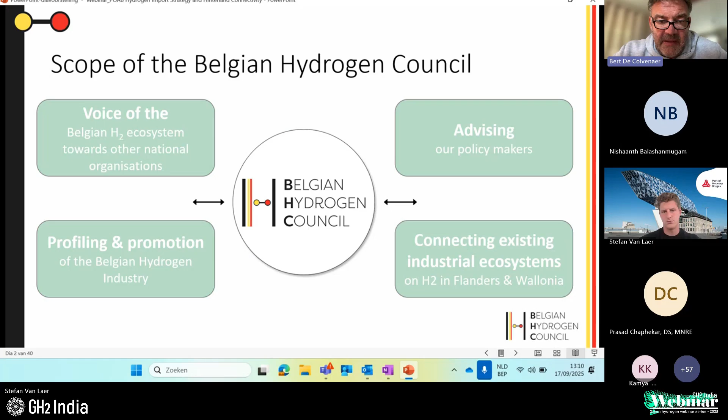Next slide, Stefan, thank you for sharing. As part of the different discussions next to the MOU we have signed in India during the missions, we have signed with Oman, we have signed with our neighboring countries, Germany, Netherlands, and France, because we believe that it's important to gather the Belgium industry and have a common voice, a one voice approach towards all of these partners, these different countries.

Next slide. The ambition of Belgium in the wider context is because of our geographical location in the center of Europe, if we may say, and also because we are right in the middle of the sweet spot of hydrogen in the Benelux, Germany, and France, where we have not enough green energy, so we need to import. We believe that with our capacity, with all the different harbors, we could feature as the import hub of green energy / hydrogen in these regions.

We have the port of Antwerp-Bruges, we have the North Sea ports with Ghent and Vlissingen, we have closely linked to the port of Dunkirk and Ostend. A lot of capacity to bring in hydrogen in its different ways and forms from across the world into this region, together with the currently being built pipeline network. You can see on this slide the different green lines for internal distribution in Belgium, but also to our neighboring countries, the Netherlands, primarily Germany, also Luxembourg and France.

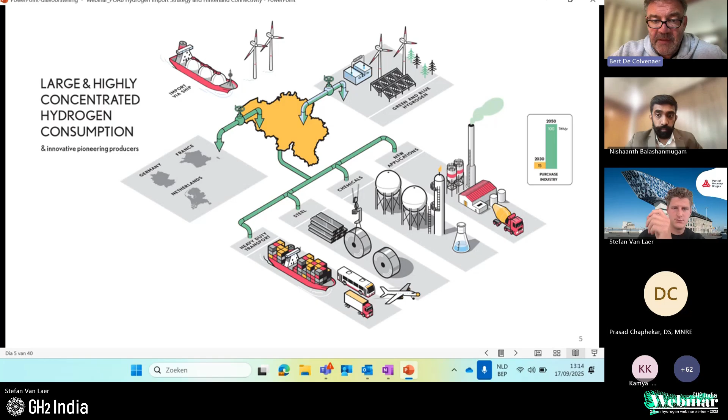The second point of the strategy is the internal consumption, which I illustrate on this slide. And the third one, on the next slide, is the capacity we have as technology providers.

At the moment, we have two important electrolyzer manufacturers with Cummins and John Cockerill. And we have different component suppliers like Agfa with the membranes, Bekaert with the diffusion layers, Borit with the bipolar plates. So all important components necessary for hydrogen production.

And I'm sure in India you have heard of all these. With all these components and many more, I will limit the discussion; more information you can find on our website. We are able to produce the applications ourselves, which you see on the bottom part: mobile applications, stationary applications, production applications, pipelining. So we have a lot of possible applications.

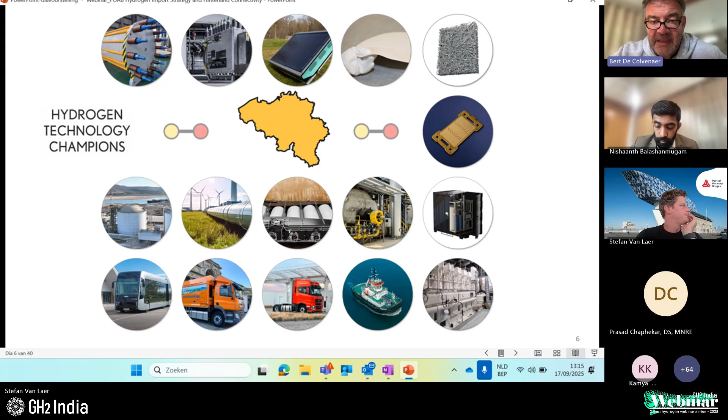So I think there are many reasons why we want to talk to the hydrogen production side. And for that, on the next slide, we have recently signed the MOU between our both countries.

As explained, the drivers for the MOU are, first of all, your abundant renewable energy sources in India, which could be used for making hydrogen. And our ambition, of course, for internal consumption, but also to be the gateway or import hub for hydrogen in Europe. Now, what is written in that MOU, simply said, these are hooks we can hang any further ambition or collaboration on.

So it's about technology collaboration, exchanging some knowledge and best practice, part of what we are doing today. The trade facilitation to make sure we develop new supply chains for the production, the transport, and the import, what we do here.

Stakeholder engagement, we have to make sure that all our industries and governments understand each other. Financing, some joint forums and collaborations to motivate, stimulate policy discussions, and showcase what we are actually doing, and making sure we understand each other's ecosystem. In both regions, we know what we do from each other, so we can rely on each other's capacity.

That's what's been signed in the MOU. And part of the implementation of that MOU is today's discussion, as you can see on the next slide. We have elaborated a couple of activities which are going to happen in the near future. During the EU Hydrogen Week, there is a delegation coming over and visiting Antwerp.

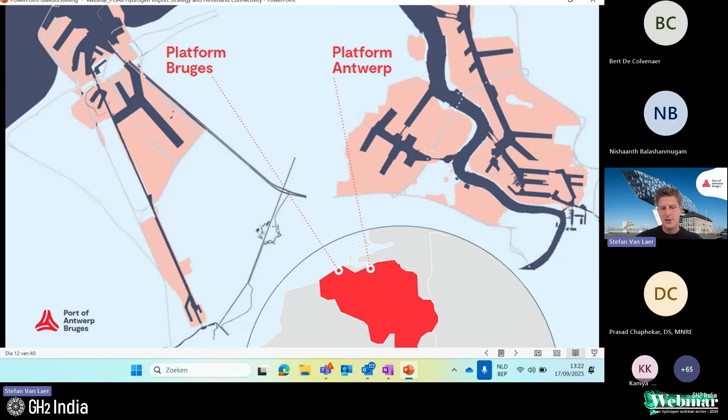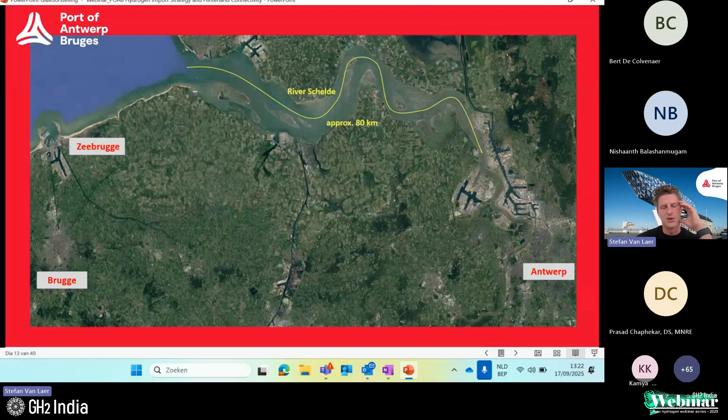Maybe the next slide is even better, you see it here geographically. There is actually about 100 kilometers, or 80 kilometers, of the River Scheldt between the two platforms, where Zeebrugge is really a deep sea port located at the seaside. Antwerp is more of a fluvial port, but due to dredging and years of experience, we are welcoming the largest seagoing vessels also in Antwerp. So in terms of draft and welcoming these large ships, this is not a problem at all.

What happened actually after merging the two ports, the two platforms, is that we have become the second largest port in terms of container capacity in Europe, after the port of Rotterdam.

And in the first quarter of this year, we also briefly surpassed Rotterdam in terms of container traffic. Also, one of the important aspects of our port, already indicated by Bert in the introduction, is that we host the second largest petrochemical cluster worldwide in our port in Antwerp.

So we have a lot of containers coming in. We have a lot of customers actually in the port itself, in the chemical cluster, which also leads to the logical consequence that there is a huge amount of logistical traffic going on in our port.

And if you take the broader picture, not only our port, but the Port of Rotterdam and Port of Duisburg, which is called the ARA region - Antwerp, Rotterdam, Amsterdam, Rhine-Ruhr region - we have 40% of European industry located in this triangle, and basically the bulk of the heavy-duty logistics is also going on in this triangle.

So, long story short, huge energy demands, huge demand for hydrogen to decarbonize our chemical industry, to decarbonize the logistics going in between, and to decarbonize our economy as a whole.

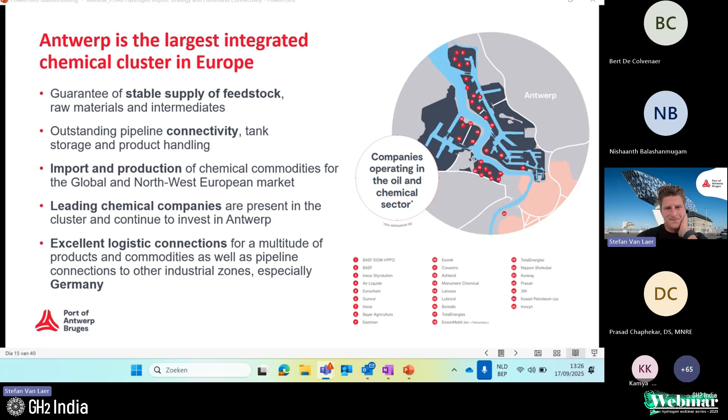So a large petrochemical cluster in Antwerp, making us already an energy port today. We have 20 million tons of chemicals output every year. We are a large LNG import hub, which I will come to in a minute. We have 2 refineries in our port with ExxonMobil and Total Energies, with 40 million tons of oil refinery capacity. Already today, there are 1,000 kilometers of pipelines running through our port, which transport over 60 products.

So it goes from all types of chemicals you could imagine. And there's already quite some tank storage capacity today - the storage of ammonia, the storage of methanol already being done today, it's nothing new to us. So also in terms of safety, in terms of permitting, we know how to do it. The only thing that might change with the energy transition is, of course, the size and scale of things, which probably will increase.

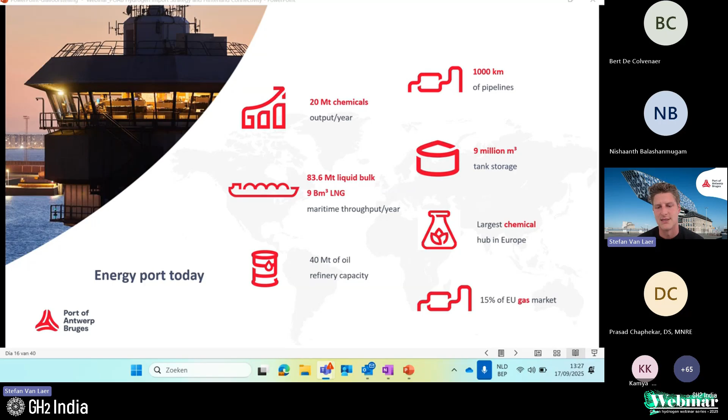So that's fossil, of course - today, a service that we deliver to Germany. But in the future, we would love to do the same for low carbon molecules - ammonia, hydrogen, LOHCs, whatever carrier you can imagine. And this might be an ideal location in the future to build such an ammonia terminal, for example.

So that was the introductory part. Let me change... Okay, maybe one thing I haven't mentioned yet - it was a bit of a good news show up until now. So, the second largest port, a large logistical hub, the second largest petrochemical hub.

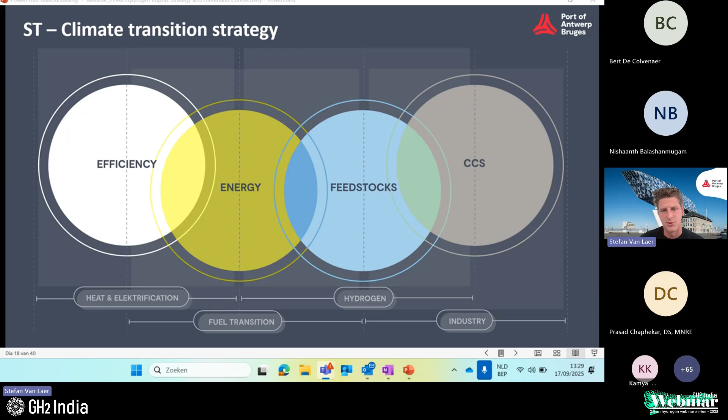The supply, where will we get the molecules? Will we produce them ourselves? Will we import them? Will it be blue? Will it be green? What type of molecule will it be? That's in the supply part.

And infrastructure, extremely important, of course, is divided into two pieces. One is the pipelines, and the other one is the import terminals and cracking facilities.

And then towards the end, of course, somebody has to consume the hydrogen once imported. So we work also very much on the offtake, which might be the most difficult piece of the puzzle today. But we're working very much with the companies to make this reality.

General remark: we are color agnostic, meaning that we will accommodate any type of molecule that will help us reach the climate goals, except for gray, of course, although the legislative framework in Europe is of course pushing very much towards RFNBO or green hydrogen.

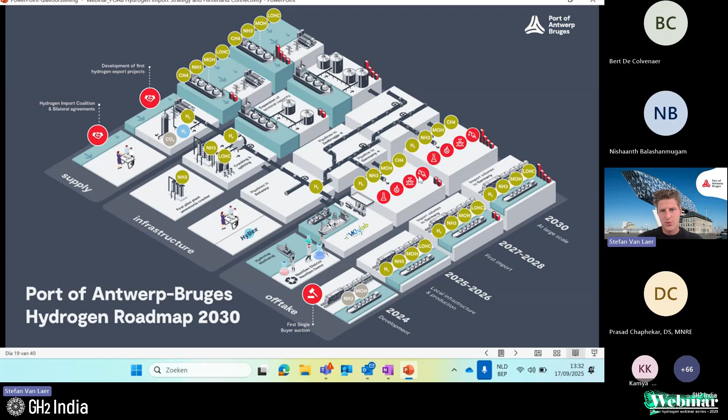Then we start with the first part, which is supply. I think Bert already indicated briefly in the beginning that Belgium, and actually the region around us, is defined by the fact that our energy consumption, or the need for energy, is far larger than our own potential to produce renewable energy. And for Belgium, it's even more the case than, for example, for the Netherlands and Germany.

If you would have a look at the Belgium geography, if you would open your Google Maps for a moment, you see that we have a coastline, but it's quite short, it's 70 kilometers, more or less. So we're working very much on offshore wind, we're working on wind parks in that region. But basically, the electrons coming from those wind parks will have to be used for direct electrification of our transport, of our chemical cluster, of our industry. So basically, we don't have a surplus of electrons in Belgium available for large-scale hydrogen production.

That doesn't mean that we don't do anything. We have a 25 megawatt project in Zeebrugge already being built today. It's small, but it's one of the pioneers, so it's being built, which we are proud of. But of course, when we talk about the large quantities, they won't come from this project alone. We're working also on a blue hydrogen project that is bigger in size, local production, but that's more or less about it.

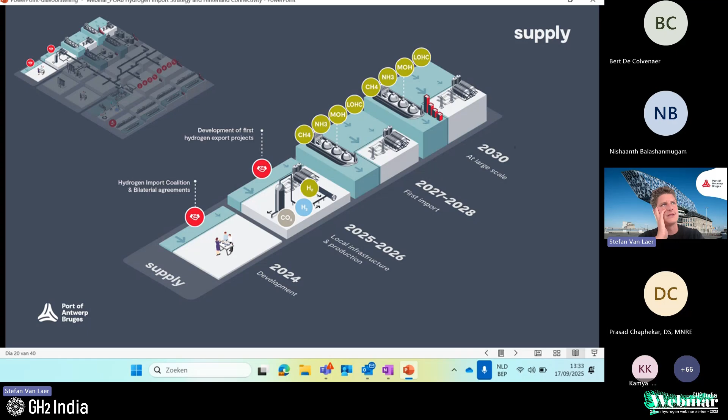So long story short, we're looking very much at importing hydrogen, which Bert already indicated. And together with a couple of Belgian players like DEME, who's a project developer, like Exmar, who's a shipping company, ourselves, and Fluxys, who is an infrastructure company building pipelines, we have developed the Hydrogen Import Coalition.

If you would Google the report Hydrogen Import Coalition, you would find a detailed report that calculates back from European targets towards the Belgian context. So what do we need? What are the volumes we are expecting? What are the terminals we would need? What are the quays we need? What types of ships would we need to actually make these European ambitions reality in Belgium?

This was already indicated by Bert. This more or less leads up to numbers of importing one-third for local consumption in Belgium and two-thirds for the rest of Europe, mainly Germany. This is not an invention of ourselves. We have compared this also to the German hydrogen strategy, and the numbers align quite well. It's what we do also today for natural gas. We import one-third for our own consumption and two-thirds go to the rest of Europe, mainly Germany.

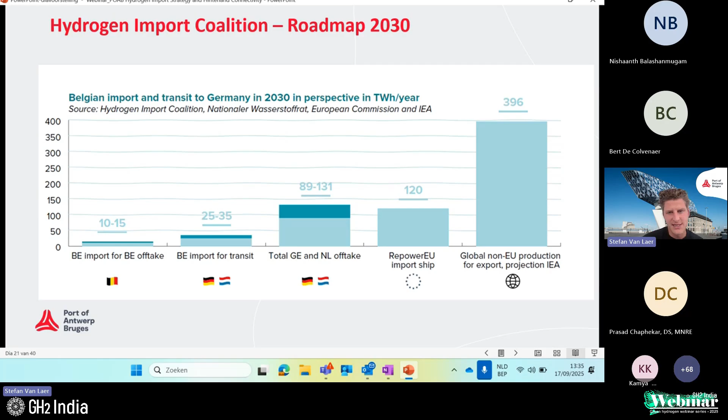Now, this was developed in 2021, if I'm not mistaken, maybe 2020 even. So things have changed, of course, with the Russia-Ukraine war, a new geopolitical context, a new economic context in Europe. So we have done the same exercise more or less again last year, together with the terminals who are developing projects here in Antwerp, and we have tried to come up with maybe a more realistic or adjusted number. But still today you see that we could import by 2030 between 1 and 2 million tons of hydrogen equivalents.

One-third for Belgian demand, two-thirds for throughput towards Germany. So even though the storyline you hear in the press is a bit less enthusiastic or hyped as a few years ago, we still see realistically quite some demand developing here in Belgium, in the region, maybe a bit slower than initially thought, but the demand is still there, slowly but steadily. In a potential future workshop, we can definitely go into it in more detail - where is this demand, how is it based on policy, what type of policy. I think that might be interesting for one of the following activities in this MOU.

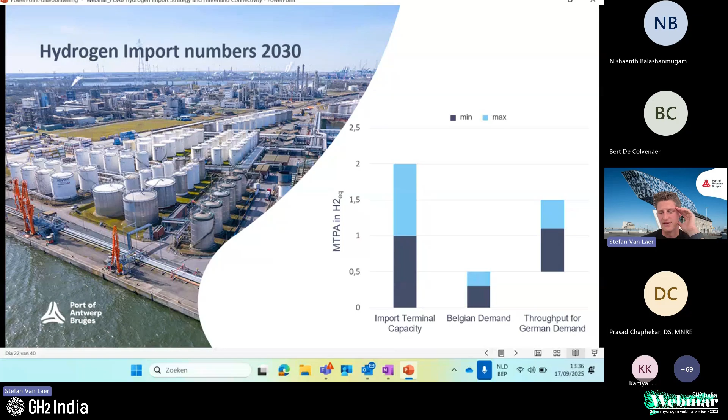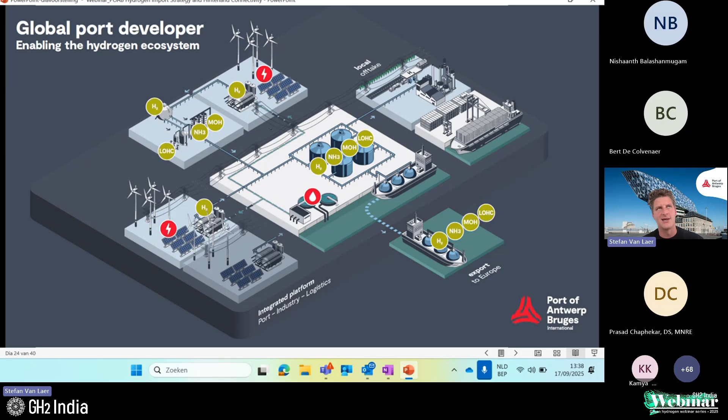But now with the energy transition, they're also looking more and more into hydrogen projects. In that regard, we are also, through this vehicle, investing worldwide in other ports with the aim of exporting ammonia and hydrogen towards our ports or across the globe. For example, we have bought a stake in Porto do Açu in Brazil. We have a stake in Port of Duqm in Oman. And the latest news was also that we will invest together with Namport in Namibia, in Walvis Bay, to build out a complete new port there with the aim of exporting molecules across the globe.

So when I showed you in the beginning the team of Port of Antwerp-Bruges that is working on this MOU together with GH2, Achille was on that slide, and Achille is working at Port of Antwerp-Bruges International. So I call him a colleague - he is a colleague, but just so you have that slight nuance with you.

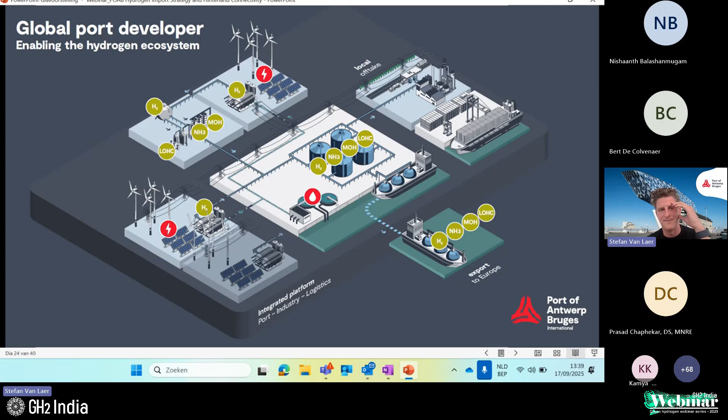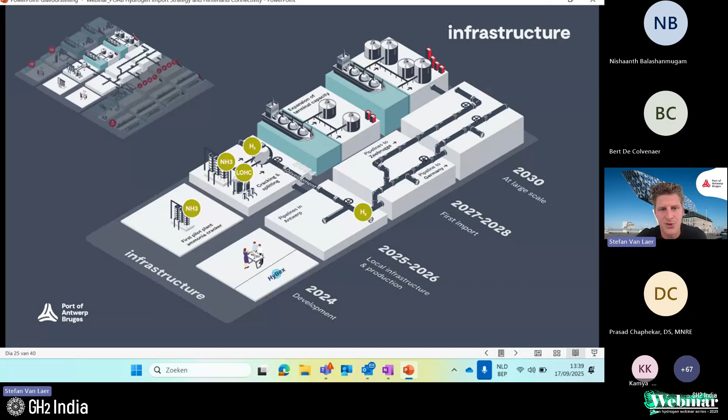Coming to the infrastructure part of our import strategy, I mentioned before it's two parts: one is the pipelines, and the other one is building import terminals and cracking facilities for ammonia or LOHCs. In this slide, you will see the publicly known projects that are being developed for now.

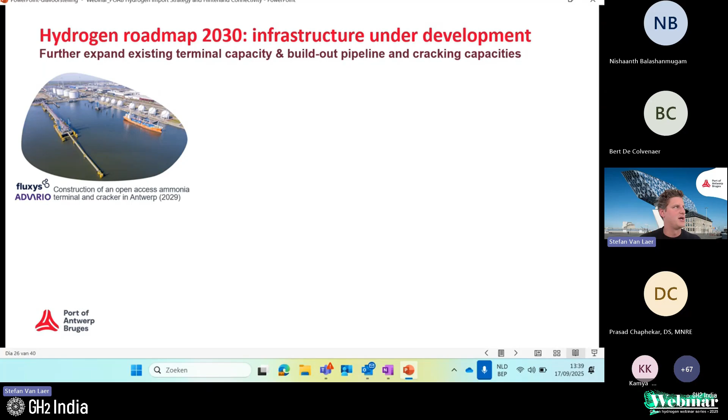So first one is Fluxys and Advario collaboration. Fluxys is a name you will hear more of further down. It's actually our national gas grid operator historically, but also since about a year and a half has been designated by Belgian law as hydrogen network operator. They're also developing an import terminal for ammonia and a cracking facility in our port together with Advario, with the aim of becoming operational by the end of 2029, 2030. Of course, timelines are always difficult.

A second project, an interesting one, is Vopak. What they have done is acquire a plot of land in our port which was actually a refinery - a Gunvor refinery that had to close during the COVID crisis and never opened again. So we got the concession back as a port, put it into the market for clean energy developments, and Vopak won it. It was quite impressive to see that during the past year and a half they cleared out the entire plot - the refinery is gone.

All the old terminals, storage tanks for diesel and crude oil, have been torn down. What they are doing now is a complete soil remediation, which should be done by the end of the year, maybe a bit further into the new year. Then they will have a 90-acre plot, if I'm not mistaken, completely available for new energies - CO2 storage, ammonia cracking, methanol storage. A very interesting case. They recently announced they have finished pre-FEED and entered into a FEED study for this project.

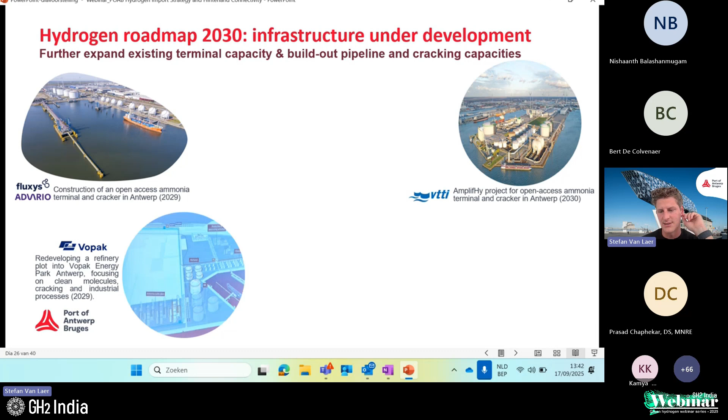Then VTTI, a similar project - open access ammonia terminal and cracker, also here in Antwerp, with a timeline of 2030. They have also announced recently that they have filed for their environmental permits. So just to show you these projects aren't just PowerPoint presentations, they're really taking steps. We hope to see one of these projects taking FID in, let's say, beginning 2026. We hope that will be a milestone.

Then last but not least, we hear a lot about ammonia cracking worldwide, but it's mostly hopes and dreams and plans most of the time. We actually have, with Air Liquide, a first industrial scale pilot operational as we speak today in Antwerp. It's located at the BASF site. Air Liquide has revamped part of an SMR into an ammonia cracker. It's operational today - they're testing the technology with this, and they have also received European funding to build a fully large-scale industrial cracker in our area by 2028.

So these are the four, let's say, publicly known projects. There are projects apart from that being developed by C-Tank, by LBC. They prefer not to be on a slide, so we respect that, of course, but just know that if you want to contact all the terminals, there's more than these four alone.

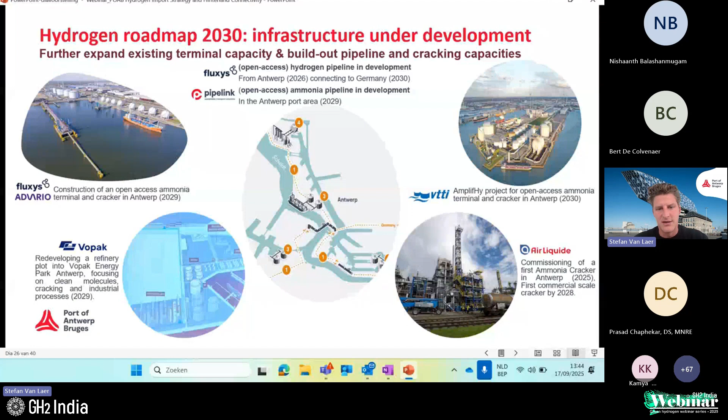Then maybe an interesting second daughter company we have at Port of Antwerp-Bruges is Pipelink. It's an infrastructure company, and as the name indicates, specialized in point-to-point pipes. These 1,000 kilometers of pipes that I mentioned in the beginning are operated by Pipelink. They're also developing an ammonia backbone locally in our port, because ammonia is being produced, imported, and used in our port. So it makes sense to have an ammonia backbone as well.

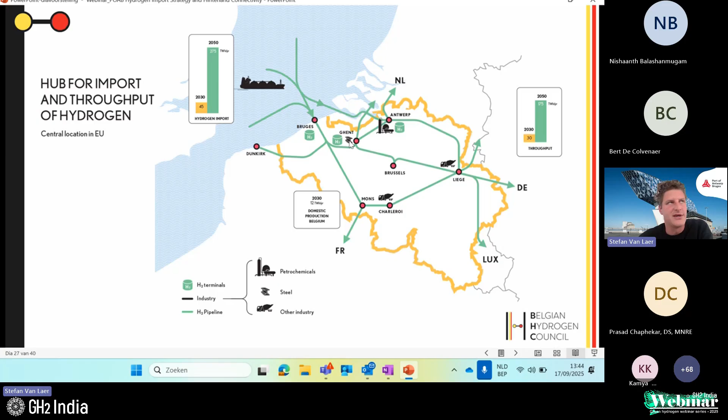And then the second part is, of course, the infrastructure. Bert already showed this and said most of it. We're building out a newly built hydrogen backbone in Antwerp, in Belgium. The first phase is already being built as we speak, connecting all the industrial off-takers in our port in Antwerp and connecting our port to the port in Ghent, where you have ArcelorMittal, which could potentially also be a large off-taker in the future. That's phase one. Phase two is building out the rest of the network, with the connection towards Germany being a very high priority for us.

And Fluxys is aiming to make that connection by the end of this decade, to then connect to OGE, which is the operator from the German side. And it's interesting to know that Fluxys has a 25% stake in OGE, which of course makes all discussions on the what, the how, and the where we will make this connection a bit easier.

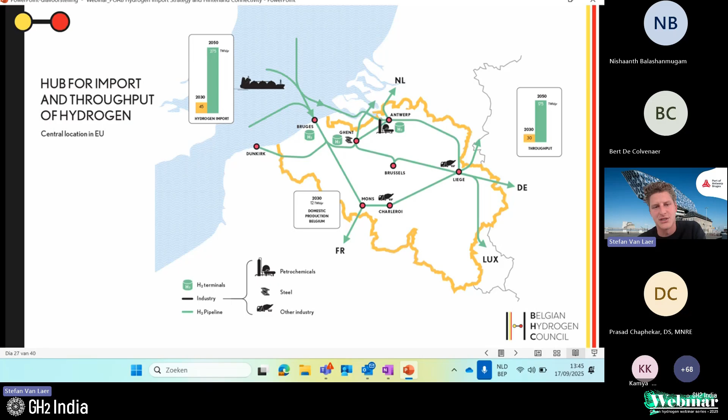This is the current use. There might be some new uses popping up in the future, like for example, Ineos is building its Project One, which is a large ethane cracker that will be fed with shale gas from the USA in the first instance, but eventually we'll also have to switch towards more sustainable fuels, and they are looking at hydrogen as well, so might be a future user. ArcelorMittal in Ghent, as I mentioned, might be a future user.

So I think in the future we can dive into these two sectors in Belgium and maybe in the neighboring countries in a future webinar, to spell out in more detail where this offtake is coming from and how much it will actually be. So this is Belgium offtake.

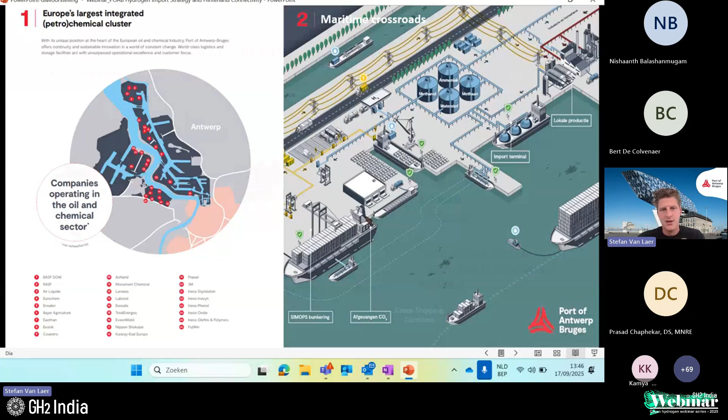The name of the webinar was Port of Antwerp-Bruges Hydrogen Import Strategy and Hinterland Connectivity. So we're coming to the Hinterland connectivity part now, in the second part of this webinar.

I don't think I tell you anything new if I tell you that there is a huge consumption potential in Germany. So we have done a study together with Fraunhofer to map where this potential consumption in the future is actually located. Also there is no rocket science involved - it's North Rhine-Westphalia, of course, who is one of the target regions, heavily industrialized but landlocked, so they don't have their own port that can supply them. So they're looking very much at Port of Antwerp-Bruges, Port of Rotterdam as supply routes for their sustainable molecules.

Yeah, this is just an overview. We are targeting all these companies in all these regions in Germany to have a bit of an overview of what is actually the amount they intend to consume, what is their timeline, what are the barriers they still experience, how can we help them. Some exercise that is ongoing this year from Port of Antwerp-Bruges side.

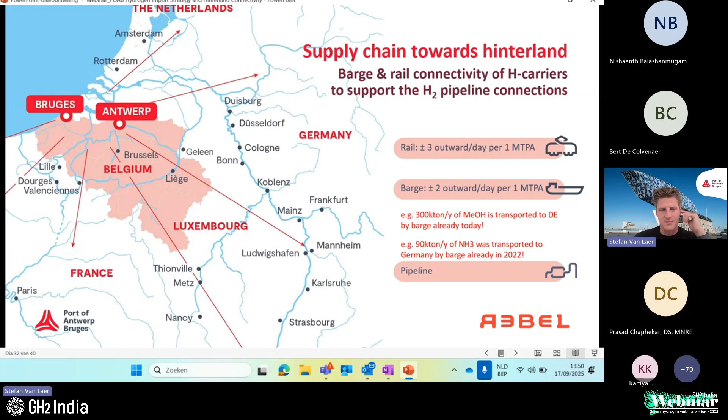And in the next couple of slides, I will present you the main conclusions from this study. So you see here in one slide or one overview what the study has done. Basically it has benchmarked four import locations, import hubs in Antwerp, Rotterdam, Wilhelmshaven and Brunsbüttel for the import of ammonia and methanol, but let's take ammonia as an example in this case, to four destinations in Germany: Duisburg, Leverkusen, Ludwigshafen. Geleen is not Germany, but the Netherlands.

In terms of 3 transport modes—barges, rails, and truck, also via roads—you see that explained here on the slide. It's benchmarking ammonia and methanol supply from 4 import hubs towards industrial destinations in terms of connectivity: rail, barge, truck. What are the parameters investigated in this study?

It's the cost, of course. What is the cost of taking the quantity of ammonia from Antwerp to destination X? Let's also take Duisburg as an example, as the main location maybe. This is influenced by the distance, how far you have to travel, but also, for example, the waiting times at locks, etc. So that is one parameter.

The second one is capacity. How many wagons do we need? How many vessels do we need? Is there congestion on the railroads? Is there congestion at the locks? That's also investigated. Are there any barriers there?

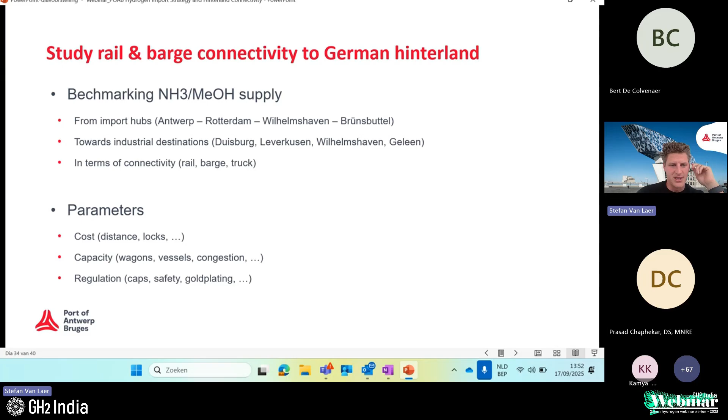What you see here is the cost comparison between the 3 transport modes. Let's start with truck to already leave it out. You see, because it's smaller scale, it's far more expensive transporting ammonia through trucks. So for the rest of the slides and the study or comparison, we will leave out trucks. Also maybe from a safety aspect, I wouldn't recommend transporting ammonia through truck via busy roads in Antwerp and beyond. So it doesn't seem like a good idea.

But if we compare barge versus rail, you see that more or less, to a large extent, the two are competitive with each other. The types of barges you see go basically from smaller to bigger ones. The mostly used type is the middle one today, but there is still potential in the market to shift to the larger, third one.

Which will be done probably in the future, making barge a bit cheaper in the future. And then for the trains, it depends on the size of the trains or the wagons, how many tons you can carry, and also whether you find a return cargo—you bring ammonia from Antwerp to Duisburg, but can you bring something useful back from Duisburg to Antwerp? This would also influence the cost of your transport. But main conclusion here: truck not competitive, and barge and rail more or less at par with each other.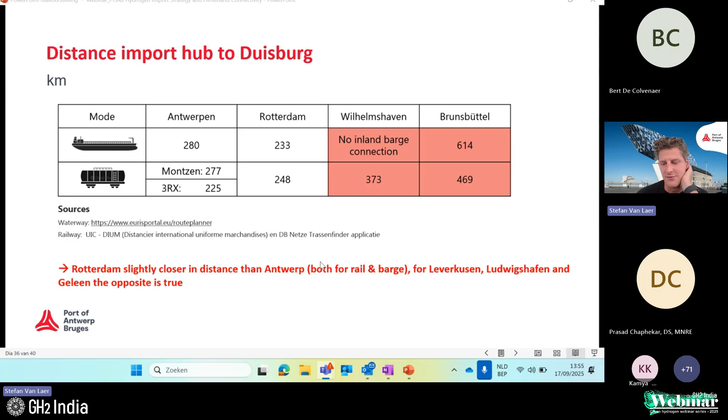So in this regard, Rotterdam is a bit closer and probably just a fraction cheaper than Antwerp for rail and barges towards Duisburg—taking Duisburg as an example. If you would take Leverkusen, Ludwigshafen, or Geleen, the opposite would be true, but the differences are quite marginal, quite small. This won't be the main influence, I think, in the whole value chain.

Then looking at whether there are any capacity constraints, with two aspects: one is infrastructure and the other is material. For infrastructure, we're looking at rails and locks. I already mentioned there is still possibility to switch to larger vessels in terms of inland barging, which would actually counter the extra traffic that will come on the River Rhine. So that will not be a problem. The same conclusion goes for Antwerp and Rotterdam.

What we have to take into account is that due to climate change, the water levels on the Rhine tend to be lower and lower during summer, leading to problems from time to time. For example, 2018 was really a problematic year with very low water levels. So this is something that needs attention and that we need to work on.

In terms of wagons for rail, on the track going through Belgium, there is a current occupation of 90 trains per day, while the capacity is 160, meaning there is a lot of additional capacity and should not be a problem. For Rotterdam, the same is true, it's a bit less additional capacity, but also there the railroad from a Belgian or Dutch side should not be a problem.

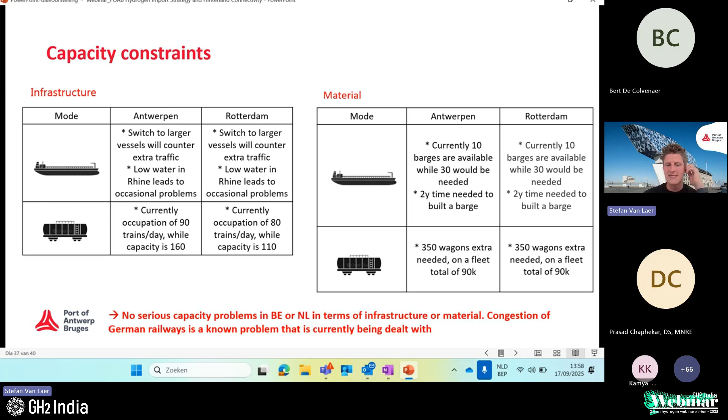Of course, somebody has to order them, and that's true. And for wagons, it's only 350 wagons extra that would be needed on a fleet of 90,000, for example at DB Cargo, which is a drop on a hot plate. So it's really not the issue. Conclusion here: in terms of capacity, some attention points, but this will not be the major problem.

Then coming to safety, which is a different story. There is European legislation called the ADN regulation that deals with the transport of dangerous goods through barge and rail, and ammonia is such a dangerous good. There is a difference between the Netherlands and Belgium: Belgium just follows the ADN regulation, so does no gold plating. In the Netherlands, there is actually a law called Basisnet, which limits the transport of ammonia over rail and barge over Dutch territory.

For barging, it's 150 kilotons, and as I showed you earlier, there is already quite some traffic today over the Rhine River. So it's not that we have an additional 150 kilotons, I think around 100 or even more is already taken up on this river. This is not something we are actually happy with, because if you take a look at Google Maps and you would have to sail from Antwerp to Duisburg or Ludwigshafen or wherever, we actually have to go first up towards Dutch territory and then go over the River Rhine. So this also impacts the port of Antwerp-Bruges. This is not something we are cheering for.